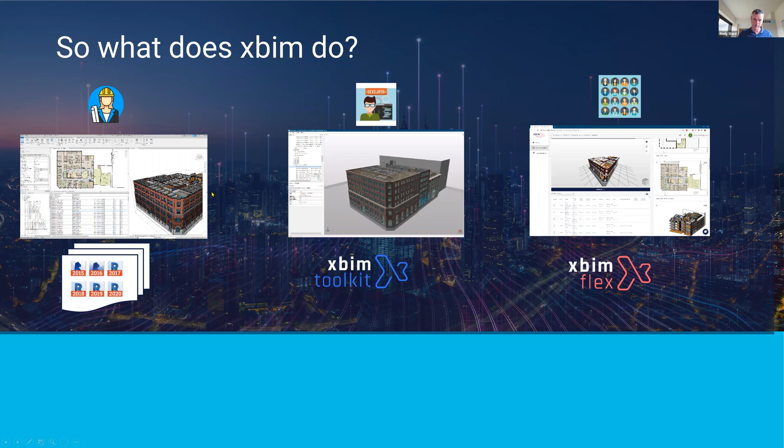So if you look at end to end, we cover the whole gamut really, from inception, conceptual design, all the way through to operation. But broadly speaking, what our technology lets you do is take designs that have come from the authoring world. So case in point, something like Revit. And while Revit is a great tool, it's obviously locked to a desktop, and it's actually quite hard for an end user to use.

And really what you want is interoperability. How can you get the data out? And we essentially help and automate how you get OpenBIM IFC data out of a tool like Revit or other authoring tools. We can improve upon the output that they perhaps do by default, streamline that, and I'll show you a quick example of that.

But where Toolkit and XBIM is typically used is by software developers who are wanting to work with OpenBIM files, so IFC, BCF, COBie, the buildingSMART standards essentially. XBIM Toolkit is a software library. It's open source. You can go to GitHub and download it, and you can use it in your commercial software. Its main audience is very much technical software developers, and I would say if you want to build a cloud application, there's a lot of work to do, and that's the case with any toolkit like that.

It works with the files, and what it does, it turns files into data, and files into geometry, things you can visualize. It does it really well, and it also lets you read and write data. So you can amend building models with that toolkit. You can also translate between different formats. And fundamentally, it turns these quite opaque and awkward to work with data files into something you can work with for a particular use case.

So why do you need Flex? Flex I've already alluded to. Flex is our cloud platform. What we've done is take the toolkit and essentially host it in the cloud and lift it up a level. And really what that does is take away all those concerns I've mentioned; trying to build a cloud application is an order of magnitude more difficult than building a little Hello World Windows application. And it's to make it trivial. What Flex does is make it really simple so that you can build and integrate and perhaps add BIM to your existing cloud application.

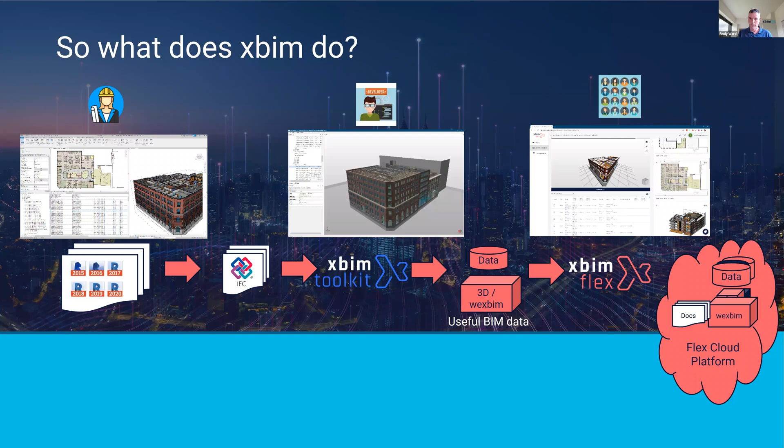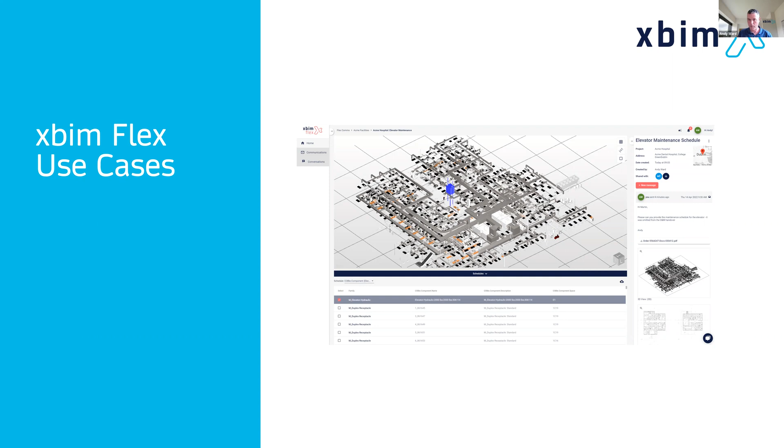So I'm going to give you a few examples now of how we've used Flex and how some of our partners have used Flex. Clearly there are many software products I can't show that belong to third parties because it's their IP, but I'll show you a couple of insights into how it can be used. So the first one is this use case of how do you get data out of a tool like Revit. It is a capability of Revit. You can file export IFC. It's tremendously complex. There's about 300 switches to do that, and every one of them seems to be set incorrectly. So it's very easy to go wrong, and what you end up with is a big file, and you perhaps lose a lot of context.

So this is a product we actually built right at the beginning of 2020, just before lockdown. In about 2 months, we built this product called Flex Comms. We actually built it for ourselves as a software product we can offer to architects. And the use case is how can I quickly get data out of my authoring tool so I can share it with a non-specialist without the need for Revit and the like. But also how can I bring over drawings? How can I bring over data that's associated with that model? And actually, let's stop sending PDFs around.

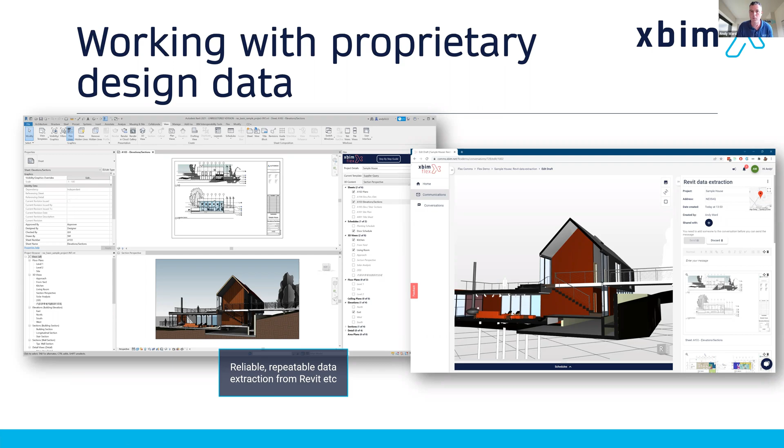So I'm going to quickly show you how we do this, and because I haven't got Revit installed on this laptop, I'm probably going to show you just a 30-second bit of video so you can understand what it does. So in Revit we've got a plugin, and in this plugin you can define a message template, and you've got an ability to link it through to things like the drawings, the sheets, the schedules, all the ancillary data that's in that model, and select just the information you want.

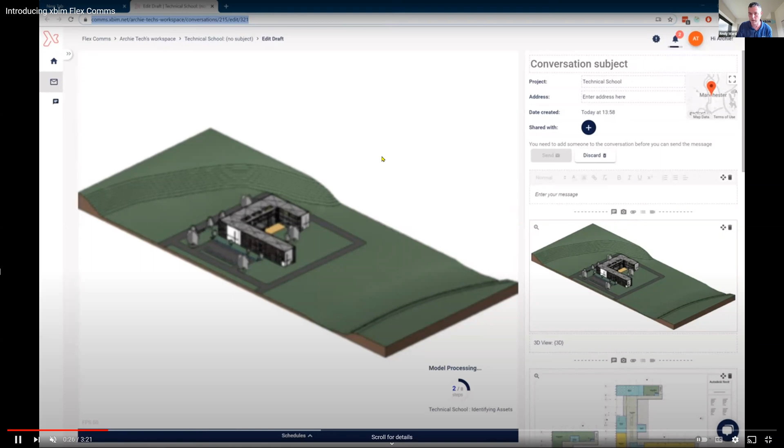So in this case, we've got a BIM technical school, and I selected a default view, some floor plans, there's probably some sections in there, and I picked a couple of schedules. And then what you're seeing here is the building model is being shipped off to Flex. In the background, we're turning it into something you can visualize. This is essentially a placeholder image. What you'll see now is, as it loads in, there'll be a 3D model that transitions to exactly this, the interactive 3D model.

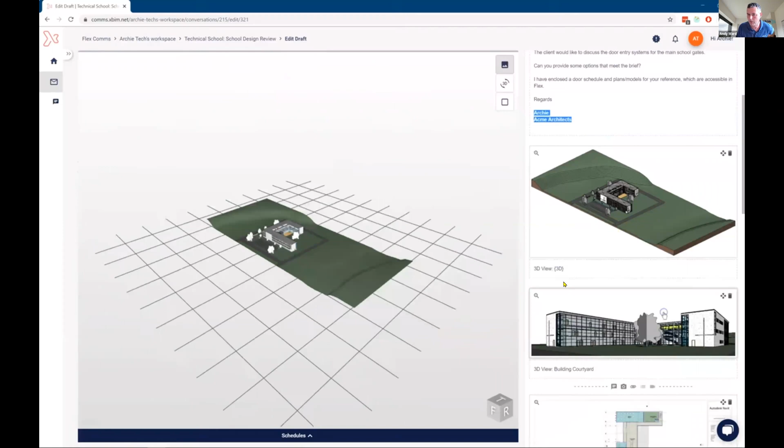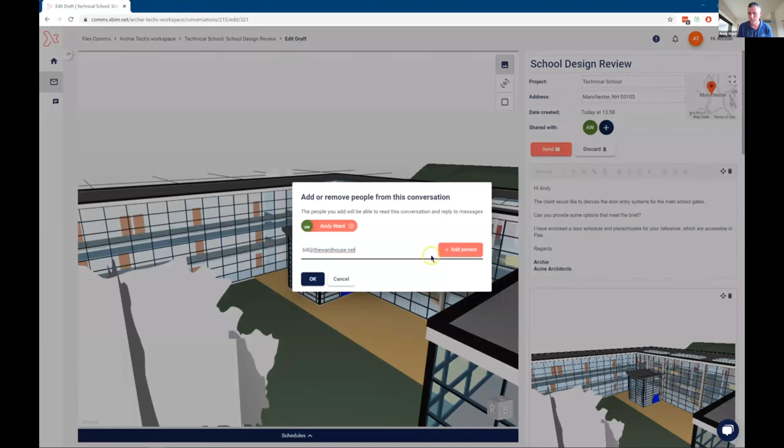And the use case here is around how do you have a light touch communication with a supplier, a subcontractor, or someone without access to Revit. What's neat in here is these saved views that I've picked are interactive, so I can take a 3D view from a design model, and it automatically will orientate the 3D model to recreate that view. What I'm doing here is highlighting some entry doors on this school, adding that to my message, and then I'm going to send it off to some other person, and they will receive an email that essentially will give them links straight back into this product.

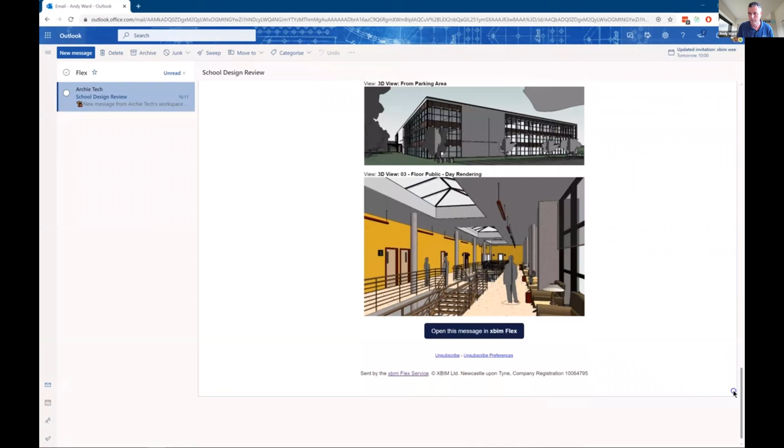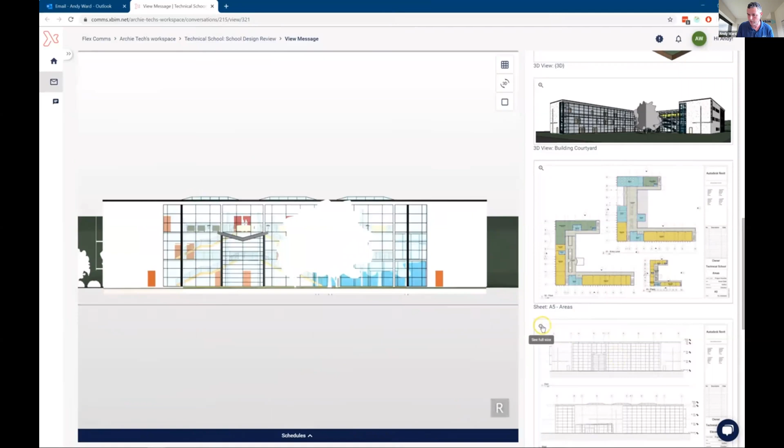So they get an email like this, containing just the contents of that Flex message, and when they open that in Flex and sign in, they can get the same view that you, as the originator of that data, sent to them. They've clicked on that 3D view there, which has reoriented the model, and then here they're going to click on some floor plans, and the floor plans will be generated on the fly based on the drawing plan. You'll also see we can open the drawing itself, so we can take the full-scale drawing, print it, and so on.

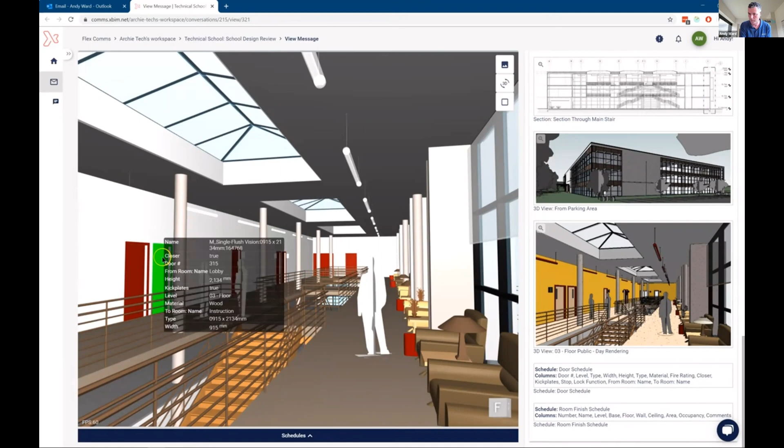And lastly, what we're bringing out here is some data. So rather than bringing out all the data, one of the schedules we added was a door schedule, so we could see, if we were dealing with a door contractor, just the data to do with the doors. In this case, kickplates and different type data relating to those doors.

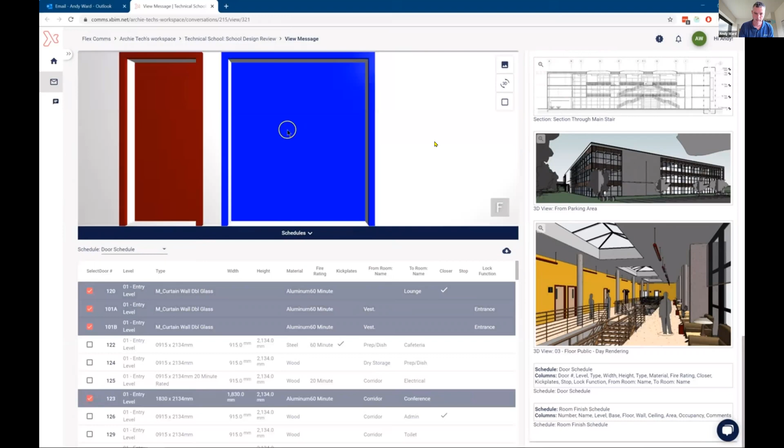So this is a tool we built in probably 6 weeks, I think, a couple of years ago, end to end with our software toolkit. Full collaboration, it's multi-user, you notice it's real time, and it's got BIM data, structural data, drawings and documents all mashed together in one application. Just to give you an idea what that looks like in reality, you can go to our website and see this and try it out for real. This is real time now.

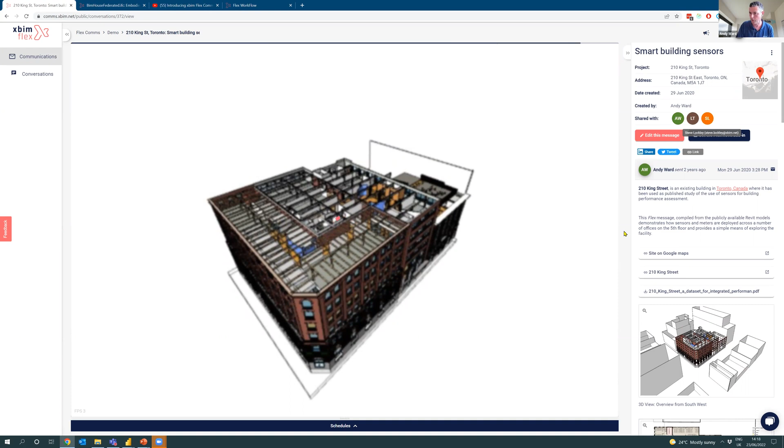So a different model. This is actually a test model of a building in Toronto. You see, it's placed on a map. We've also linked it through to other bits of data, a link on Google Maps, or maybe a PDF of some specification data. And you'll see it in use here. So I can take that 5th floor plan, click on that, and it will cut the building at floor 5, as if it were a drawing.

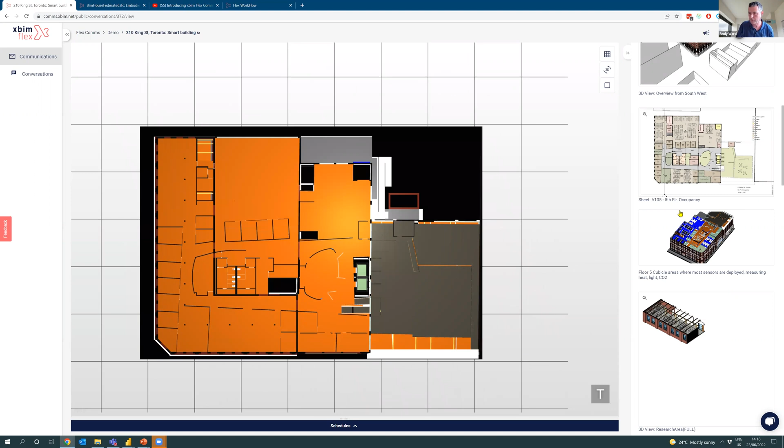Equally, we can do things like, okay, we're interested in this room. This has got a bunch of IoT sensors in it, and perhaps we want to narrow down on this part of the building so that we can undertake some analysis of our IoT data. I'm just going to reset the view again. I'll show you that interactive aspect with data.

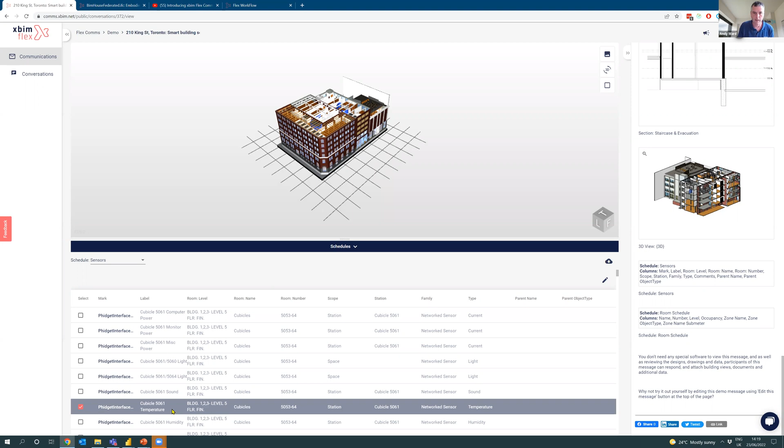So I've got all kinds of sensors in this building, and we're going to load them in now. This is obviously data you can search, filter, and export to Excel. But it's really useful when it's tied together with the building model itself. So these are a bunch of sensors in cubicles. So we've got a temperature sensor. I can select it, it will flash, and I can click on it and actually take us through to that sensor in the 3D model, and we can see exactly where it is in that building.

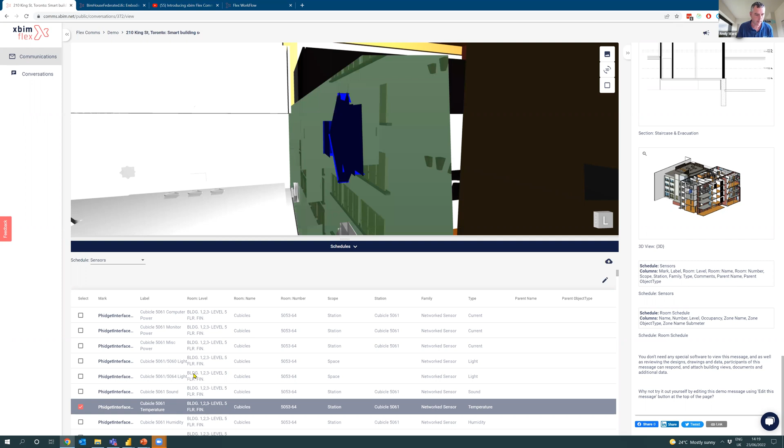So that gives you an idea of this. This application is a SaaS application that we make available. But really, it's more of a demonstrator of what you can pull together quite quickly with our platform, and certainly how you can get data out of the proprietary world.

So I'll take some questions in a bit, but I'll show you an additional use case. I'll just talk through this one. All that data that I showed you there, you know, door schedules or sensor schedules or whatever else. What's interesting in Flex is if you were to need to capture additional data against those, anything in that model, but you want to classify them, in this case, add a serial number or an inspection date, this is a writable model. So you can take that operational asset and start to treat it as a master record.

And start to maintain and capture data against elements in your building. So in this case here, I guess it's a fire extinguisher. You maybe want to capture the serial number or the QR code. You maybe want to capture the last time you checked it, and record that against a physical asset in the building, not just a row in a spreadsheet somewhere.

And because that starts to raise flags around who can do this, the important thing is it's all backed by access control. So you may have a group of people who can change serial numbers and a bunch of people who can rename spaces or whatever. So it's backed by access control, and it's backed by versioning and audit trails, so you can see who's done what when. And there's a rather interesting bit where you can go and see, well, how did the model look a week last Tuesday? And it'll show you how the data looked or the building looked at that point in time.

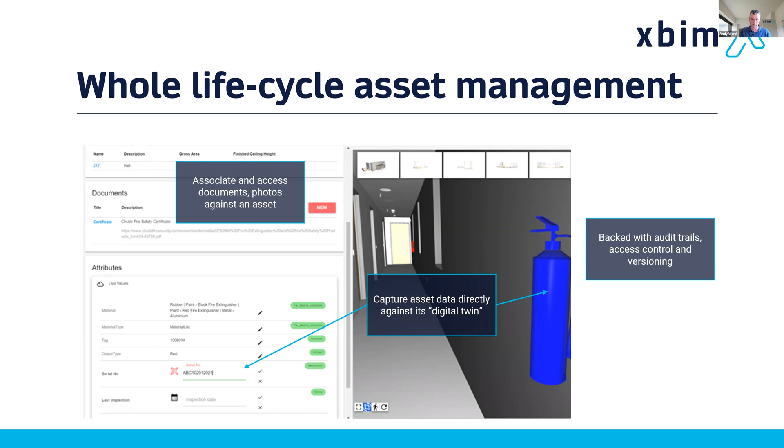More prosaically, I guess you can tag things, you can put documents against anything, you can put issues against things, jobs, spares. Essentially, it's an online COBie data management platform with the 3D in the mix as well. So that's one of the use cases we've got there, and I perhaps won't show that today, but just give you an idea of things you can do, and think of it as an editable data set.

One of the things that we do quite a lot with as a separate use case is working with infrastructure projects. So just to give you an example, on the top, working with an organization who has a specialism in costing and carbon evaluation on infrastructure projects. So that's highways, roads, tunnels, bridges and the like. Specialists in costing, but also carbon. And their product is fantastic in terms of a kind of a calculation engine, but it didn't have a BIM capability, didn't have a 3D takeoff.

And that was an example where their ultimate client said we need to demonstrate BIM capability really quickly. And with using essentially XBIM Flex and the cloud power, we're able to really quickly do BIM quantity takeoffs, integrate that feature into their software product. So while this is a Windows application, this is all coming from the cloud. Lots of positives with that. Basically means you're not distributing around large infrastructure models that are quite sensitive. Lots of access control, and you just access the data you need to access. So in this case, we're querying the amount of piling depth we need to drill for a particular flyover here.

Give you a couple of other examples. With digital twins we get involved with, particularly kind of offshore type things, are quite interesting. A lot of work with hospitals, schools, data centers. So it's really scalable, and we've got a particular specialism in managing infrastructure projects.

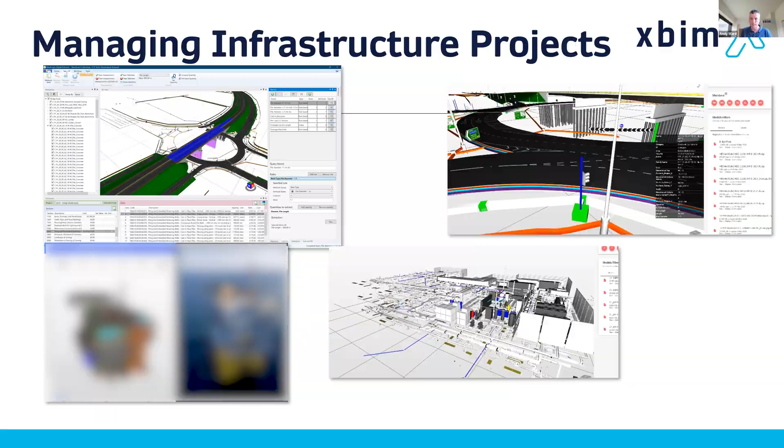Third use case is what I just mentioned earlier, and so this came out actually during lockdown. It was an early stage proof of concept to see whether we could undertake a life cycle carbon assessment or life cycle assessment to calculate carbon, embodied carbon, in a building design more efficiently than it's currently done today. And if you're familiar with what's involved with this, by and large, carbon assessments, if you're going to do one, get done really late in the process, and they end up being quite costly and quite manual.

So the poor old carbon consultant will probably get a bunch of drawings, maybe some bills of quantities, and from that will have to establish what is the probable carbon impact of that design. And unfortunately, what ends up happening is you may have not a brilliant impact, but the only way to resolve it at that point is not to change the design because it's too late. It's to offset with trees and so on, or carbon credits. So what we're trying to do here is say, can you do this automatically? Can you take the human out of the loop, and can you make it really cost effective to undertake a life cycle carbon assessment on a design straight from an authoring tool?

Clearly, this is a very small example, and I will briefly show it to you. But what we've done here is build an automation system that can take the human out of the loop. So these are the steps involved with doing carbon assessment: it starts acquiring data, classifying it, cleaning it up, measuring quantities, and ultimately what we've done here is assign to elements in this building a best case and a worst case, average, median, and also a category of what it is and therefore what carbon we've associated with it in a spread.

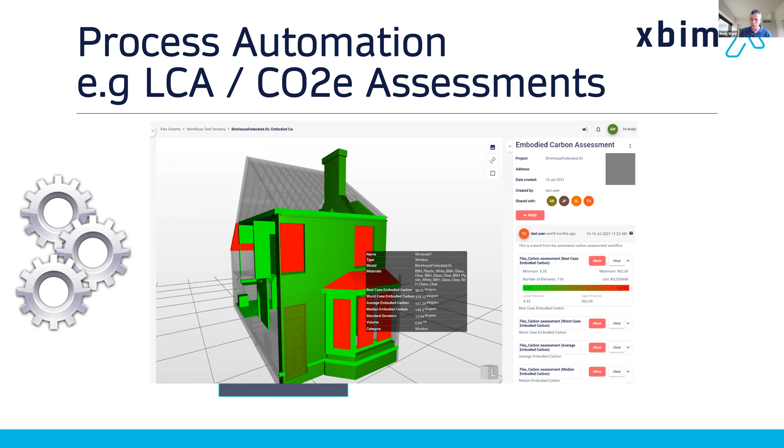And from that, the idea is you can then establish where your hotspots are. It's a heat map essentially: where should I spend my time focusing on improving the situation. I will quickly flick over to show you this in use. So this is that model. It's a small house, obviously a terrace house. We chose it because it's quite well classified in the first place, and it was publicly available. This obviously works on much bigger models in reality.

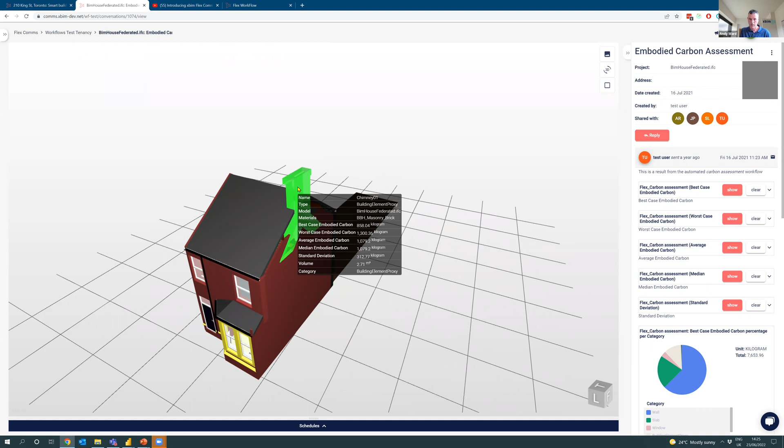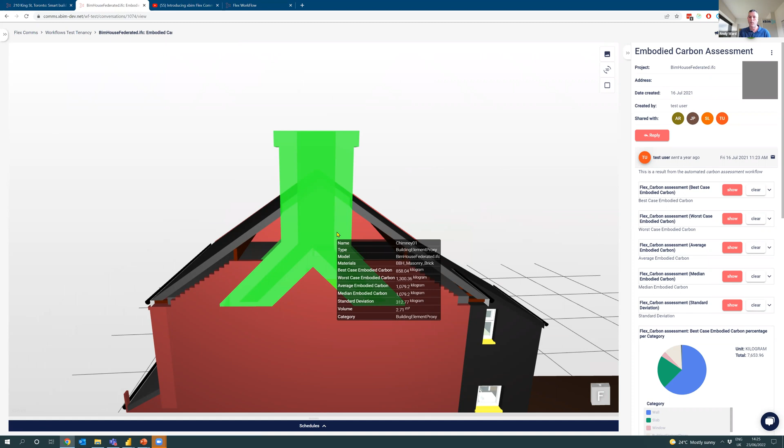To give you an example, I'm putting my mouse over there. Chimney stack, which is masonry, and you'll see it's obviously a peculiar shape. It's got a void in the middle, clearly being a chimney. It's funny Y-shaped chimney breasts, two different fireplaces. But we're able to work out, for instance, the volume first, because you need to work out what the fundamental materials are in this element. So our calculation engine can go and calculate how much masonry there is.

And perhaps if I took a different example of a window, clearly there'll be different kinds of materials in a window. There's glazing, there's aluminium, there's UPVC, and we can quantify all the materials for that and do a best guess on what the overall carbon is. Best case, worst case, depending on how you sourced it, different cradle to gate strategies, and so on.

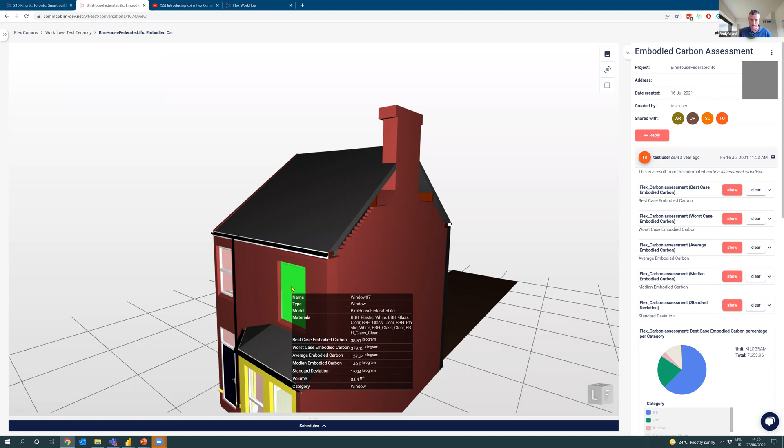And then with all that comes a bunch of analysis, so you can start to look at this building model and say, well, where are my hotspots, best case, worst case, or overall, where should we be looking? Okay, some of it's in the slabs, some of it's in the walls, some of it's in the windows. And the last thing you can do is compare this with earlier iterations of a model. So you can take the carbon in this version of the model and compare it to the earlier version and see whether you've got better rather than worse. So you can optioneer over time.

And behind the scenes, this is just the front end. This is how we report on it. The important part of this is that model came in without any carbon data in it, but we've augmented it. And the way we augmented it was with our workflow engine.

And our workflow engine leans quite heavily on software build automation, continuous integration, where software developers put in code to somewhere like GitHub, and a routine will automatically kick in, download their software, make sure it meets the standards, make sure it meets the house protocols, and then stamp it and version it, and then build it and test it, and ultimately stick it somewhere you can download or on a website that can be tested. And it's complete. There's no human in that loop.

And so we took that same approach with BIM and said, how can we do that same thing? How can we take a building model and validate it? So you may want to say, I want a building model that must be IFC 2x3, or it must be 2x4, or I need a building model that's got all these elements classified according to Uniclass, or whatever you want. So essentially, we've got a completely programmable means of working with building data in the cloud. This is going through and running a script: check all spaces of a name.

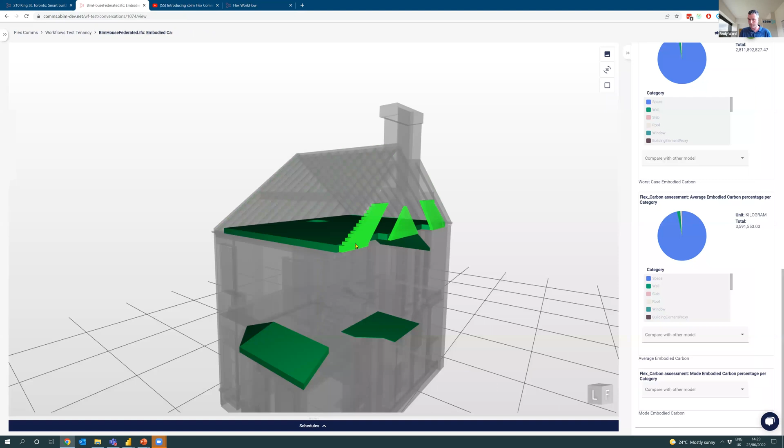The other side of this is essentially people can upload models to it, and they will go through and be automatically inspected, going through those steps. We validated it - one of the things we did was update the model and place it in a different geolocation, exported all the elements, ran a carbon assessment, which spits out some CSV data in terms of the bill of materials and their carbon impact, and lastly published that augmented model back up here where we could visualize it. All that is done literally by uploading a model, and it works magically. So that's our workflow tool.

I think the last thing I want to discuss is what you see here: you've got a cloud platform to manage building data in XBIM Flex, and you can quite quickly build up a portfolio, a large set of different models. Those models are great, but really people deal with many different projects at once, or many different buildings at once. How can you have that single page view of your dashboard? How are all my projects going? How are all of my facilities going? That's really where Flex has a strength, because it's not really file centric.

It's a data kind of cloud of all your BIM, all your building models and all your asset information models in one place, with access control based on who you are. So that means you can then start to provide dashboards that report across all of your projects, linking real time into all your buildings.

So just to give you a couple of examples, we can build dashboards for this, but one of the nice things we can do is hook it into tools like Power BI. If you're not familiar with Power BI, it's a dashboarding, visualization, reporting tool from Microsoft - a mashup tool that will speak to many different sources of data. One of those sources is an adapter we have that plugs into XBIM Flex, so it can also speak to Excel spreadsheets you have on site and bring in your building data and mash them together.

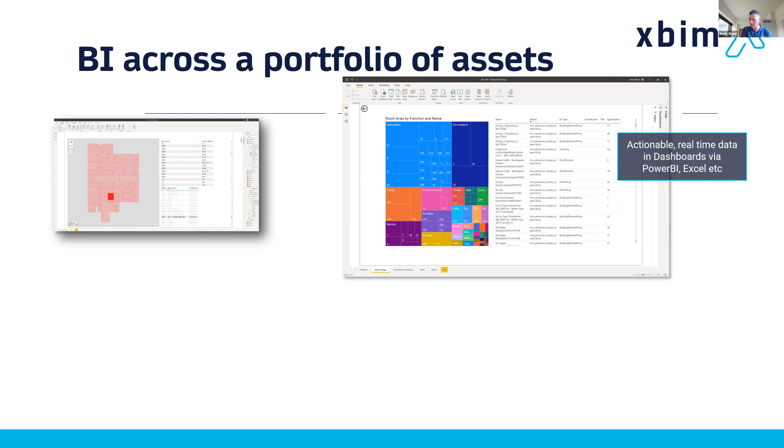In this case, I've got an example where we're looking across all of my buildings and looking at space utilization - looking at all the architectural spaces and seeing how they're classified. In this case, we've got schools, so we've got instruction spaces, but also administration spaces, circulation, and so on. What's interesting here is all this information is coming from not just one model, but all the models that this current user can see. So as an exec, you can look across all of your projects that are live now. As a facility manager or asset manager, you can look across all of your assets.

What it also does is give you a relatively simple no-code means of working with your building data. This is still Power BI, and it gives you essentially a set of database tables that are all linked together and traversable. In this case, it talks about models which have facilities, which have spaces on levels, and in those spaces or rooms there will be components with types and issues and so on. Everything's linked, and then I can bring in data - in this case we brought in the uniclass tables so we could cross-reference the classification analyses.

So that's a really powerful tool, and equally it also works straight in Excel. You can take Excel and dynamically integrate it with XBIM Flex so that your Excel spreadsheets are linked and live in real time to your building data. In this case here, we're just extracting which spaces I've got in my chosen models. I thought it was an interesting use case because it really is about how do you work pan-project and take a mile-high view of all this data we're capturing.